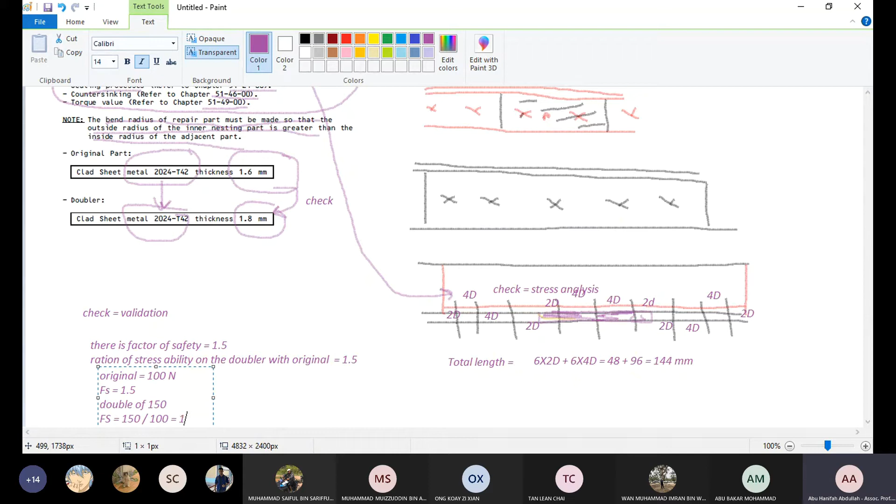It's how we try to understand the factor of safety. Means we have this 50 extra - this doubler having 50 Newton extra. We have extra, whatever happens, we have extra 50 Newton. We're not gonna load the structure to more than 100. You limit to 100 only, because that's required to get 1.5. So we always have 50 Newton extra.

What is this 50 Newton extra for? For errors - if we make errors in design, errors in manufacturing, maybe you cut a bit short, maybe your material is a bit thinner. Error, okay, and also environment - maybe we have corrosion, environmental effect, you may have corrosion build-up. So you'll still be able to have a safe structure until someone sees there's a defect and repairs it. So that is what we need this extra for.

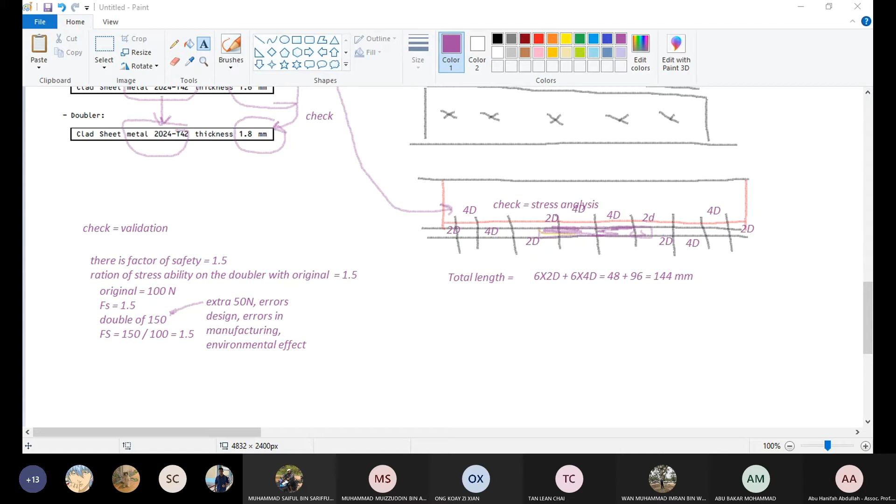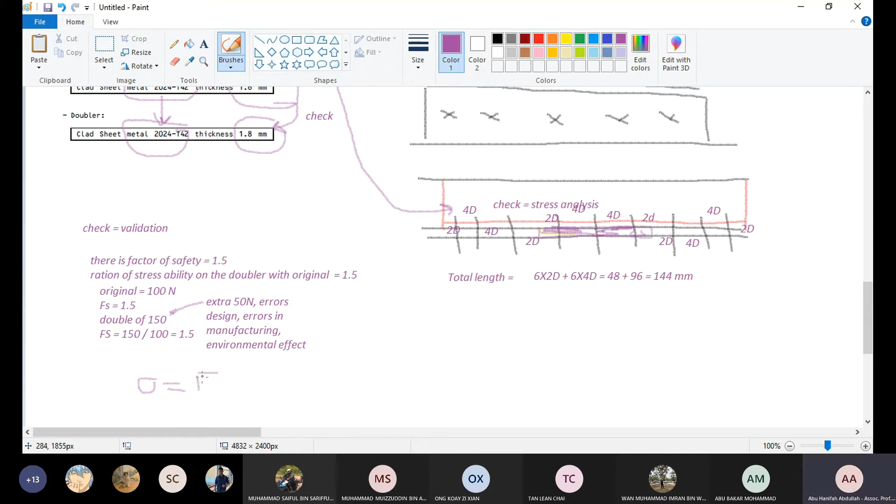Next we have to check how you gonna check the validity or the strength of the doubler? So whatever you do, you have to go back to the fundamental: stress equals force over area. Force or load will equal stress times area.

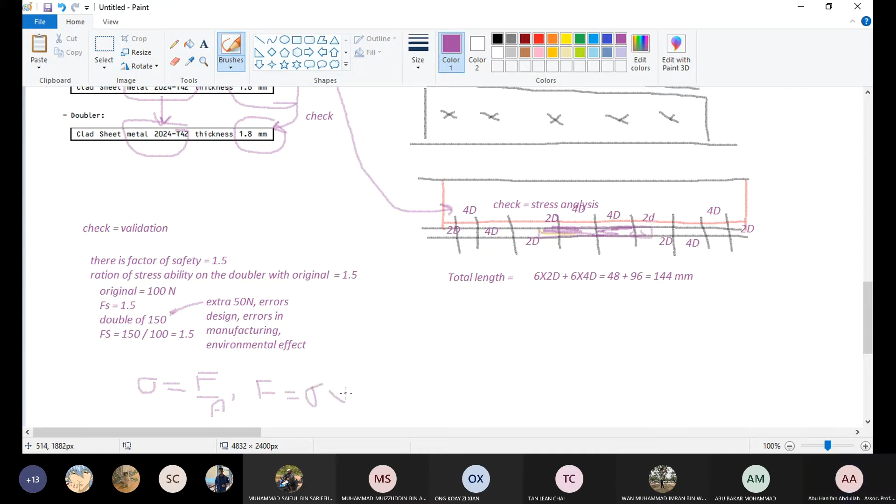So what are you looking for here? You are looking for load loss. Remember earlier I've been talking about you remove the flange - you remove the horizontal flange, you have lost the load ability, the load carrying capability. So load loss is due to removal of the horizontal flange.

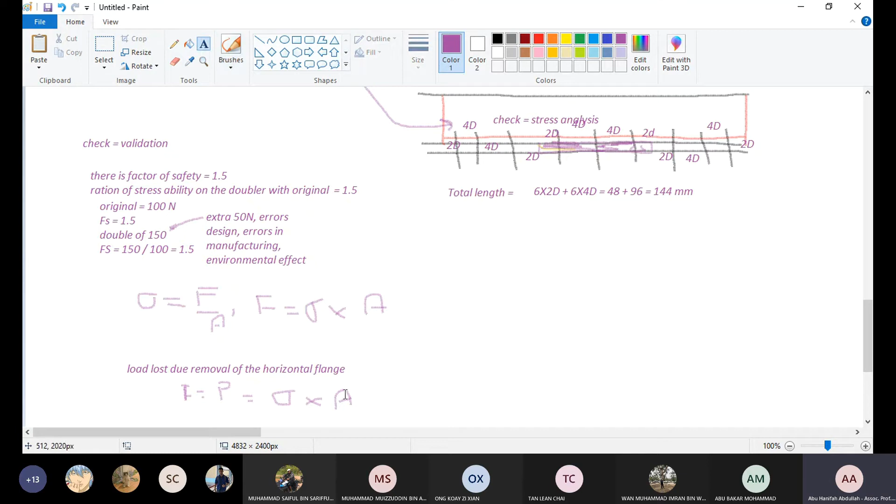So how do you want to calculate that? You have to use this equation again. So the load loss, which is force - sometimes we put P, sometimes we put it FP - but just say load loss equals stress times area. Area is the cross-sectional area, here is the cross-sectional area of the angle.

So what is the stress? Stress is what you get from, remember I've been talking about stress and strain. As we pull the structure, we test them and we come to the point where it breaks. So this one is maximum stress, FTU. Before it breaks, it starts to yield, start to give away. So here is FTY.

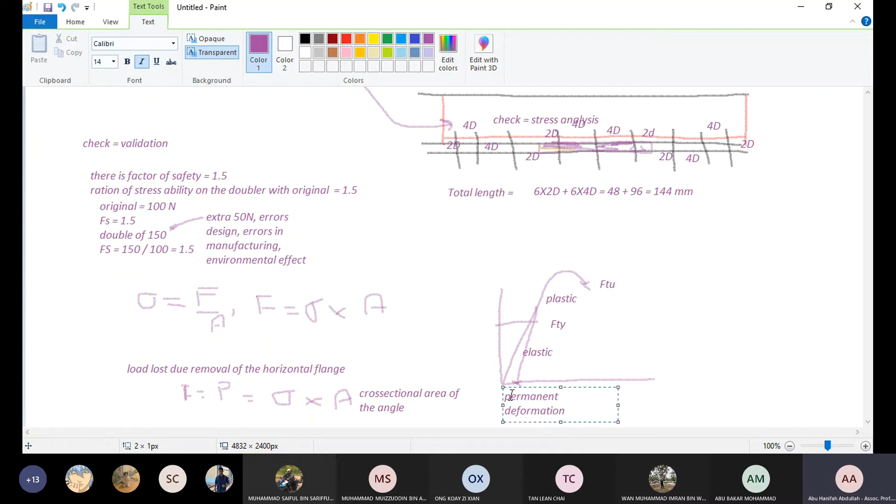FTY yield - so after the yield point, this region we call it elastic, so after yield we call it plastic. This is plastic. Once you reach this plastic region, you have potential of deformation. If you release the load, it will not come back to original point. This is permanent deformation, which is not acceptable in aircraft structure design.

So that's why we have to check - you have to check FTY times 1.5.

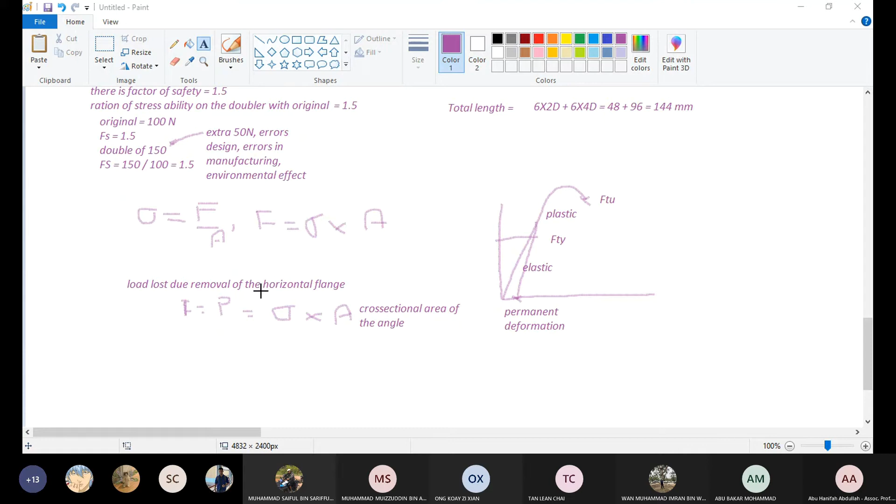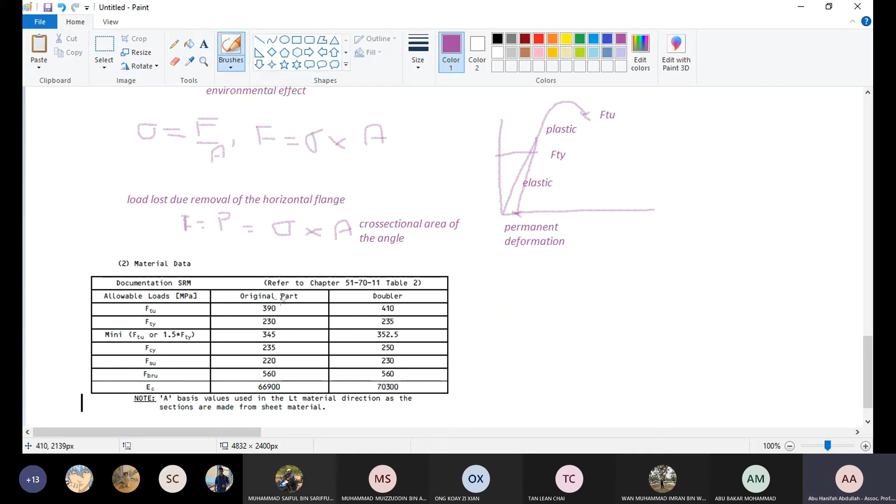That's why if you look at the SRM, you have to verify either you select FTU, which is here, 390, or 1.5 times FTY. So FTY here is 230. If when you multiply FTY with 1.5, you get 345. 345 is somewhere here, say here is 345.

345, so now we have to choose the minimum, FTU or 1.5 times FTY, whichever is minimum.

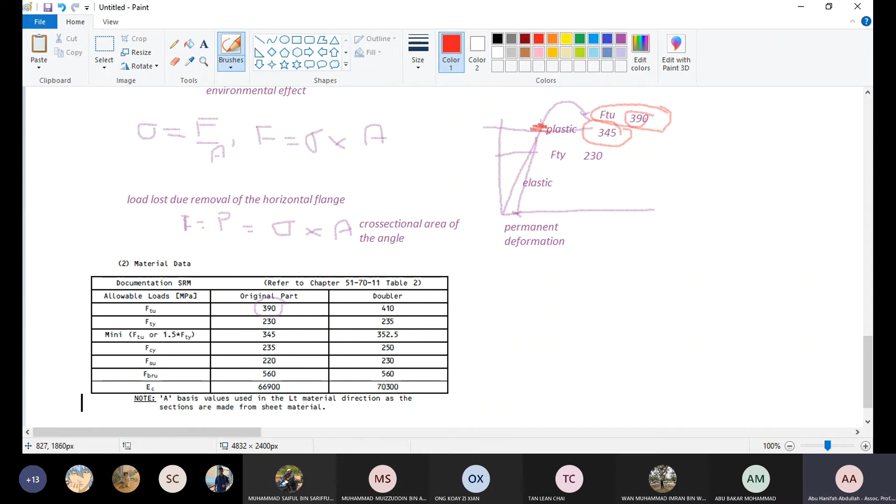What does it mean here? After you multiply 1.5 to the FTY, you will get 345, which is somewhere here. So the FTU is far higher, 390. That means the material has gone very far into the plastic region before it breaks. That means if you come to this point near the break, it will be deformed. We don't accept that, that's why we use the critical 345. 345 is obviously higher than FTY, it's already deformed, however not as much as the FTU, before the FTU. So we choose 1.5 times FTY in the analysis.

So always do that, always check that. Questions?

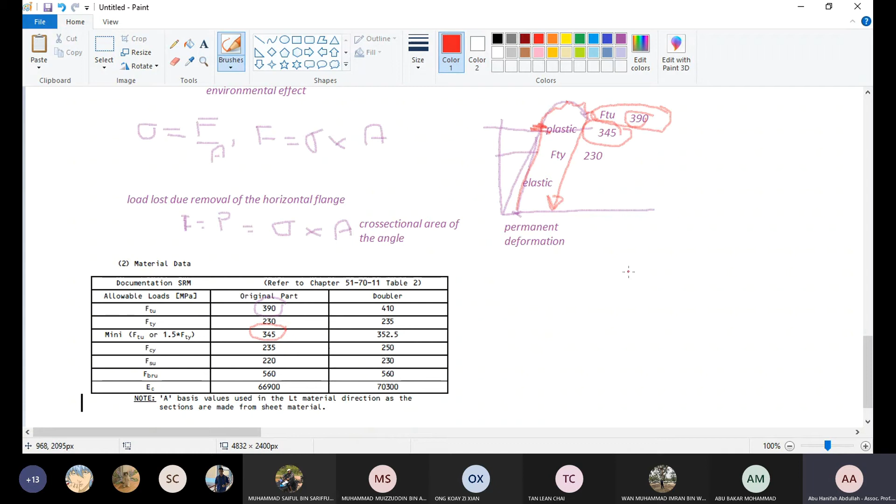Okay, now we have a problem: how do we get this value? So to get this value, you go to 51. You can see here is 51, 70, 11, table 2. So you go to 51, 70, 11, table 2, 3, table 4, table 2.

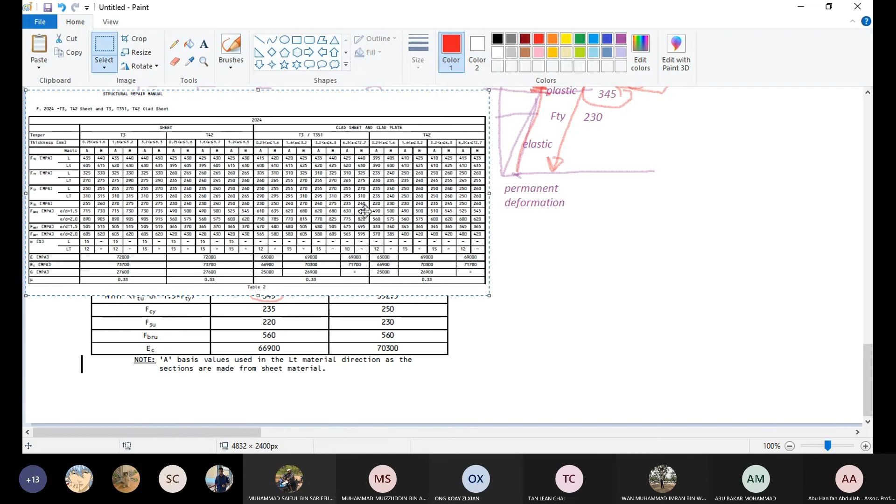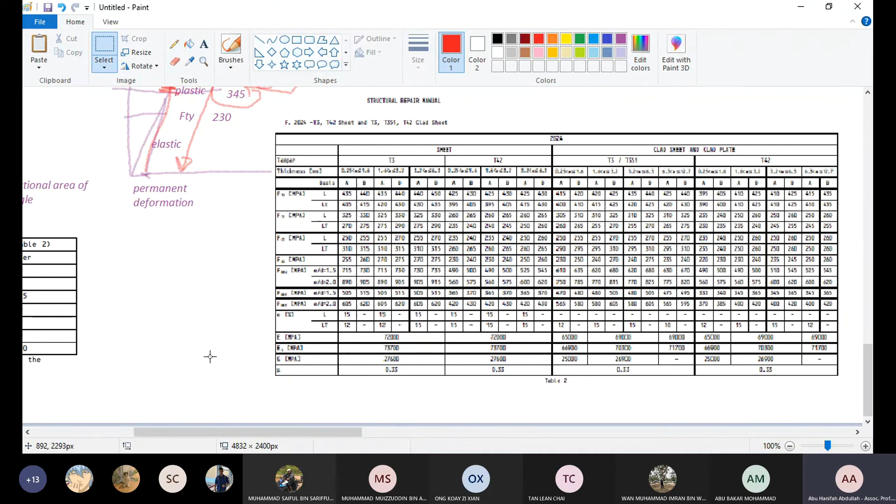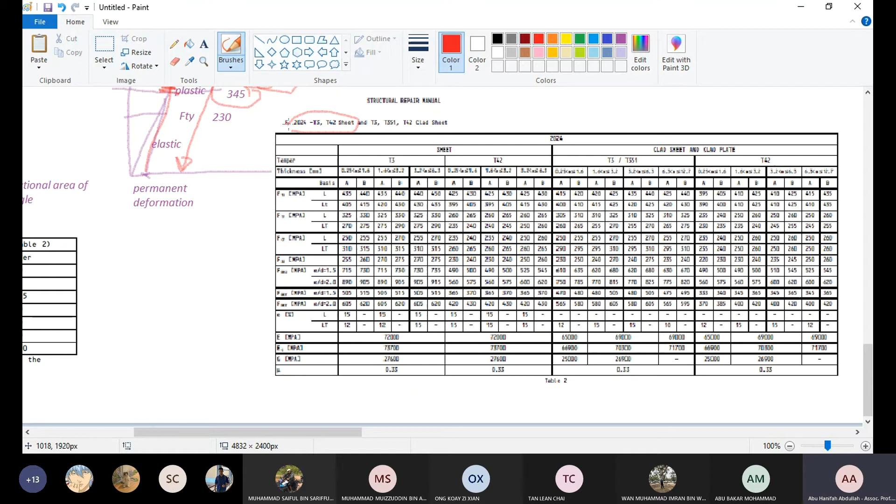Okay, let's look at table 2. Let's explore table 2. How do we want to see table 2? You can see table 2 here, 2024 T42. Is it sheet or clad sheet? I think we stated earlier it's clad sheet. So you go to this clad sheet, here. Now T42, this is T42 clad sheet. Then you look at the value here, FTU, FTY. So you always zoom into this.

Okay, the 390. And then you look at the FTY. So I will zoom further here. Okay, let's look a bit more. Zoom it further. Okay, further.

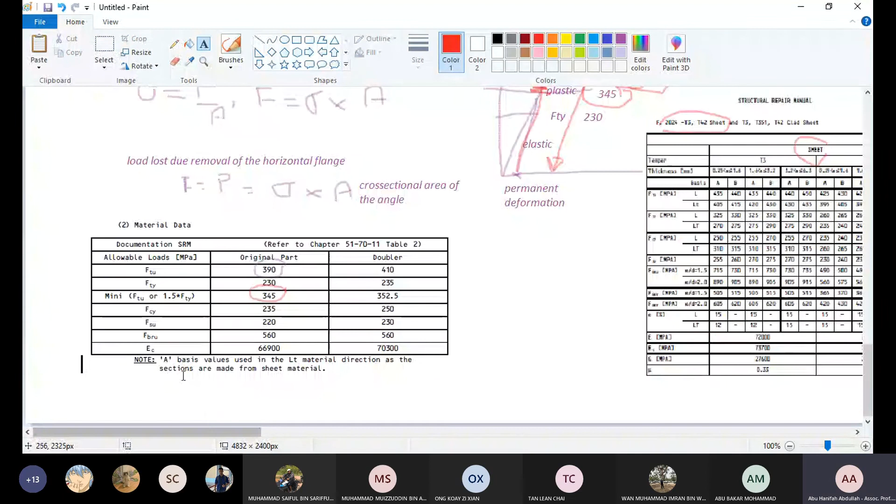You have to choose either A, B, L or LT. Let's look at A first. A is the basis value used in the L or LT material direction. A is the value when they did the test. Most of the time they got this value, 395, 390. That's the most common value they get. But sometimes they got 405, 400. So this 395 and 390 value is more accurate because during the test they got the strength for L as 395, and for LT 390, more than the times they got 405 and 400.

This is in megapascal. Why is this important? Because A is more conservative, B is less conservative. They use A for the primary critical structure. Why? Because A tends to give a heavier structure. So you want to be more conservative.

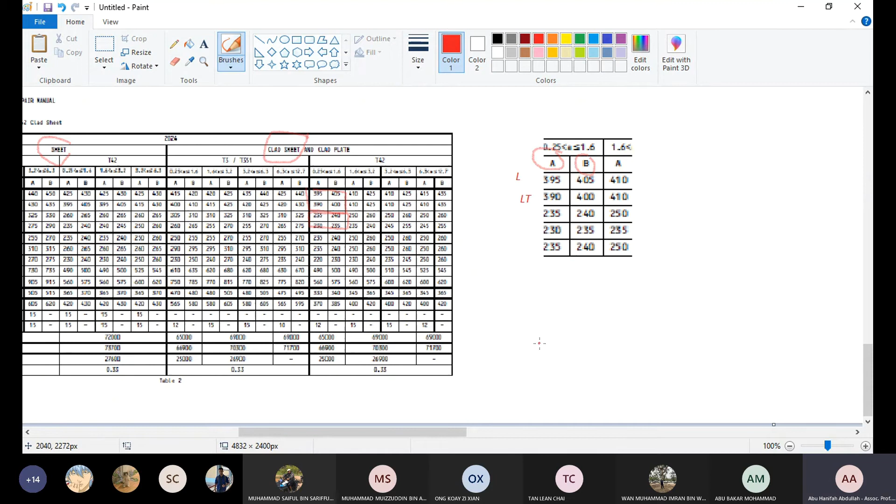Then what is L and LT? L and LT relate to the roll. When they make the material for the plate, it comes in a roll. As they spread the roll, the direction of the roll is L, and the direction perpendicular to the L is LT. This is important because the grain of the material follows the L direction. So if you pull the load along L, this is stronger. But if you pull along the LT, this is less strong because it will easily break the grain. That's why you can see the value here is 390, and then the L value is 395 - you can see the difference of 5 megapascal between L and LT.

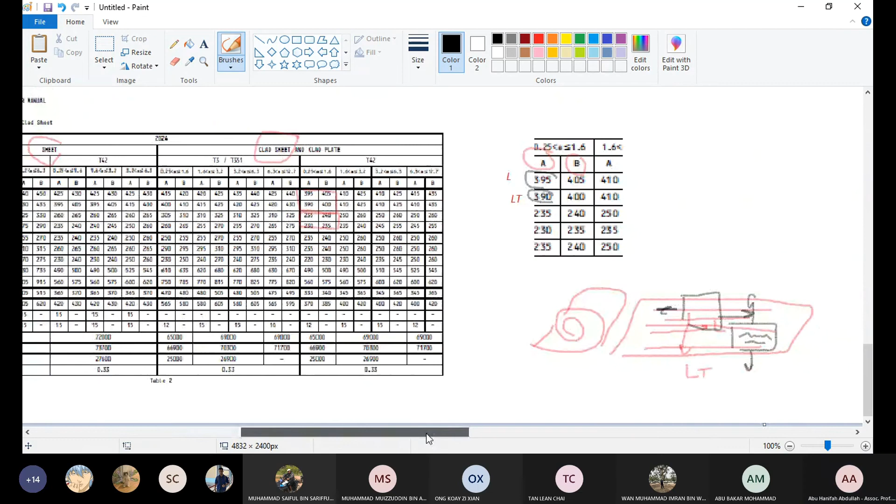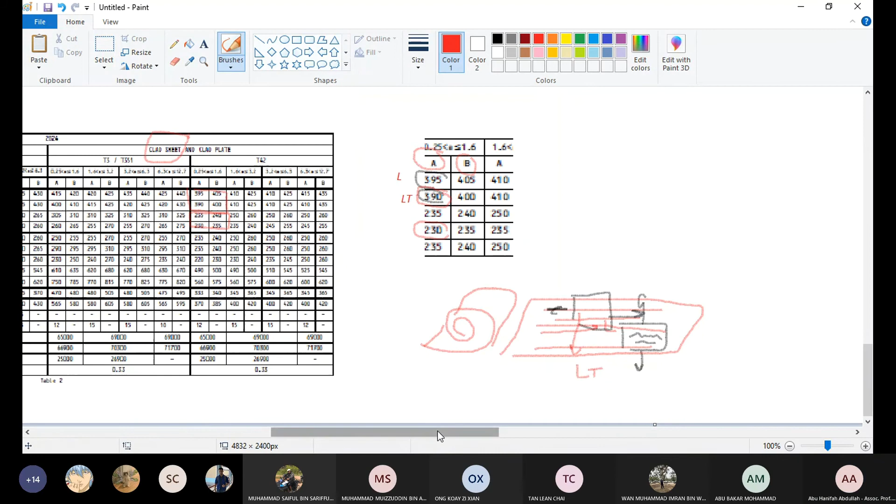To be conservative, we use A and LT. That's why the value we chose is 390 A-LT, and 230 for the FTY A-LT. You can see here the value is 390 and 230, and doubler here is 235.

This value is used to check the failure of the doubler, and FCY here to check the failure of the bearing - this is FBRY. And here is to check the shear failure of the plate.

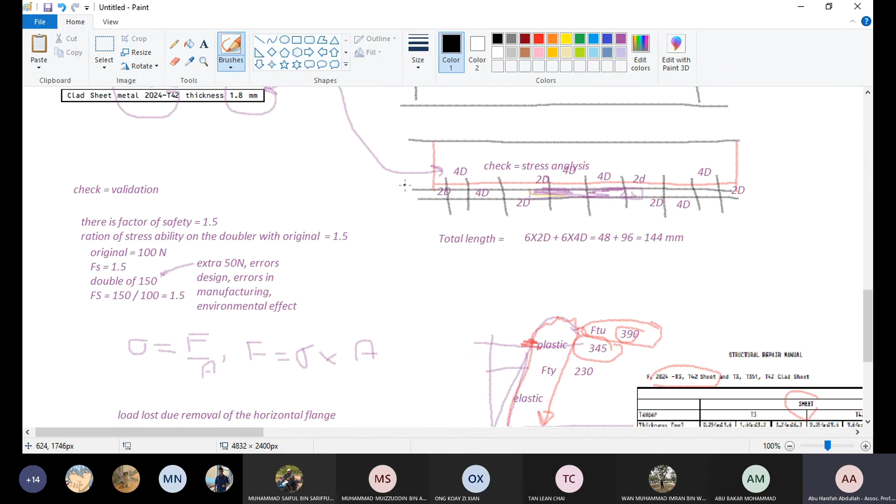What can happen for any splice? You may fail in various ways. So let's put a simple splice - a plate, and put another plate. Just an example - we have another plate coming out here, with two fasteners here. This is the plate we pull; maybe take a section of this.

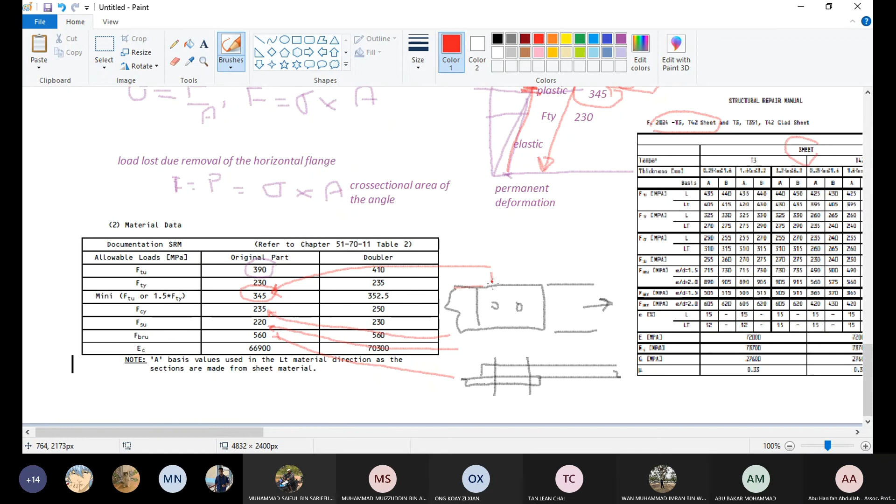So imagine, we can see from the bottom, we put two rivets. So what can fail? The plate can be cut off through here - they call this net tension failure. And the fastener may migrate through here - that's why we have to have good edge distance, so the fastener doesn't come out through here. That's why we need good edge distance. We call this shear out.

Because the fastener will be shearing off at the edge distance - this is shear out failure. So for the net tension failure, we use 345. For the shear out, we use 220. And then you may have bearing failure - bearing means the hole here may elongate, making an oval. To determine the bearing failure, you use the FBRU.

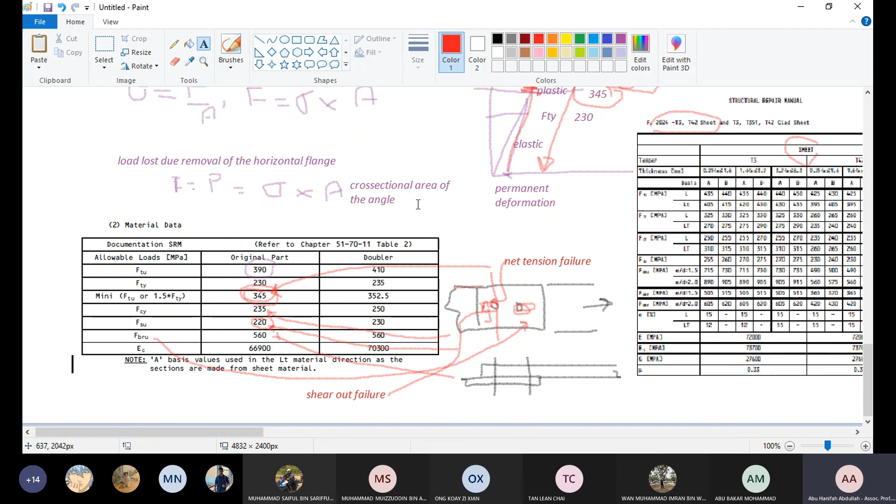The formula is the same. Net tension failure is still stress - the force for net tension failure will be force equal to stress times area, or you want the stress, force over area. Similarly, shear out still uses the same formula: force equal to stress times area, or stress equal to the load on the plate over area. And this stress will be compared with the material strength.